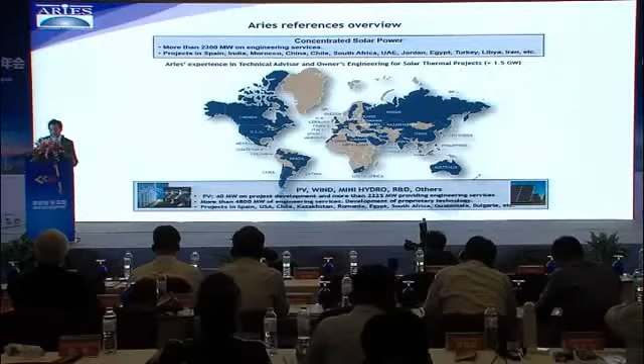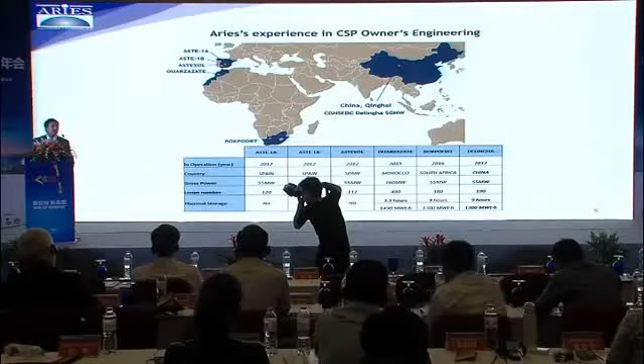In any case, I would like to point out the value, the experience in technical advisor and owner engineering for more than 1.5 gigawatts. The real experience in owner engineering is based on three 50 megawatt plants in Spain. These plants were constructed around 2009, 2010, 2011. Noor 1 was the biggest parabolic trough line in the world. Bokpoort, 55 gross power in South Africa, and nowadays the Delingha project.

What, at the end of the day, is the role of the owner engineering? Revision of engineering, something that was commented here. We are talking about the revision of basic and detailed engineering, typically from the EPC contractors, given that the warranties have to be provided by the EPC contractors. Quality supervision, monitoring of the schedule, which at the end of the day is part of monitoring the contract, contract management. Summarizing, safeguard the owner's interest.

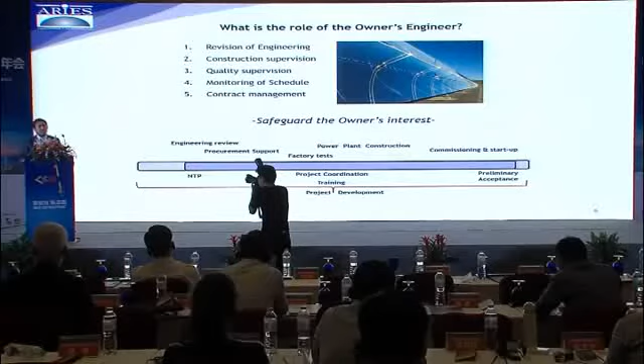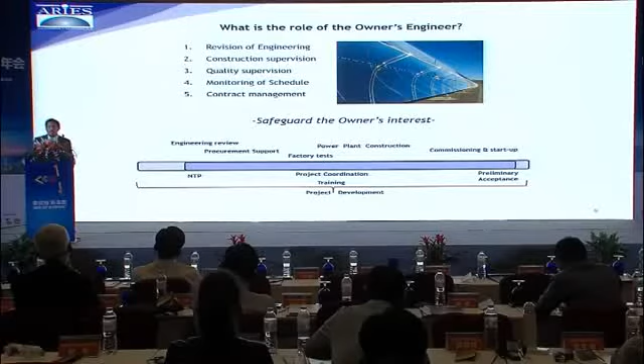This scheme, it's not always the same for sure, but is representative of the typical timing for the activities developed during our works in this kind of project. The previous stages, basically review of engineering and procurement, after that mainly the supervision during construction, commissioning and startup. The target: achieve the preliminary acceptance on time. I try to make a brief presentation, not going really deep into all the details, but I would like to show big numbers of these projects.

The first one is 50 plus 50 megawatts in Spain, called Aste 1A, Aste 1B. At that moment, you can see that the CAPEX was huge. We are talking about the boom, with very expensive components, with big warranties from the EPC contractors. In that project, we did the development from the very beginning: basic engineering, main equipment purchase process, financial model development in order to enter into conversations with funds and banks to raise the funds for the project, and all the works with the EPC contractor, like specification, tender evaluation, and negotiation with contractors.

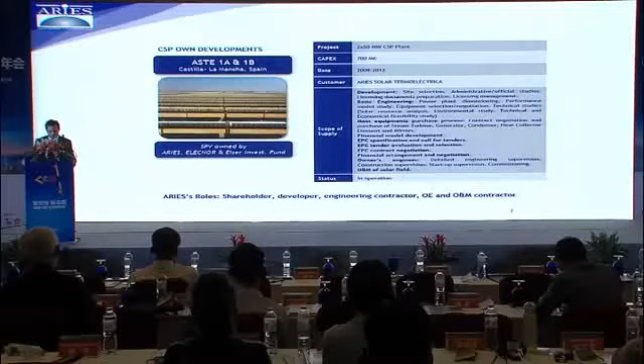In these two plants, we are part of the ownership. We have about 7% of the equity of the project, and these couple of plants are now producing about 105% of the initial guaranteed energy production. Astexol 2, another plant in Spain, very similar to the previous ones, so I try to go fast on this one. The other project was a couple of 50 megawatt plants, one close to the other, and this is a plant with only 50 megawatts, and the process followed was similar.

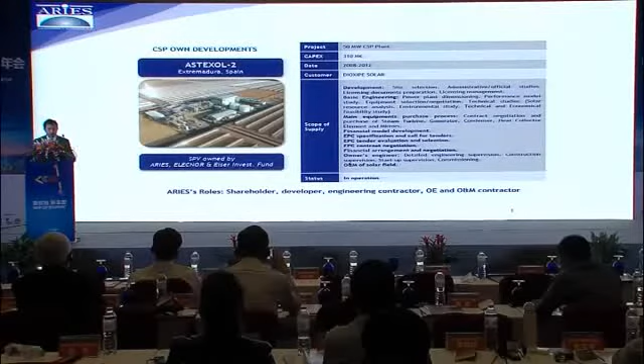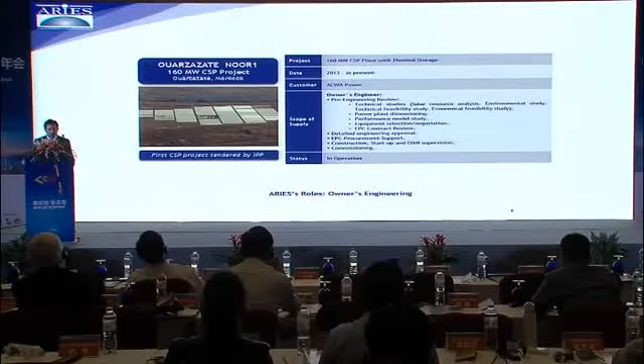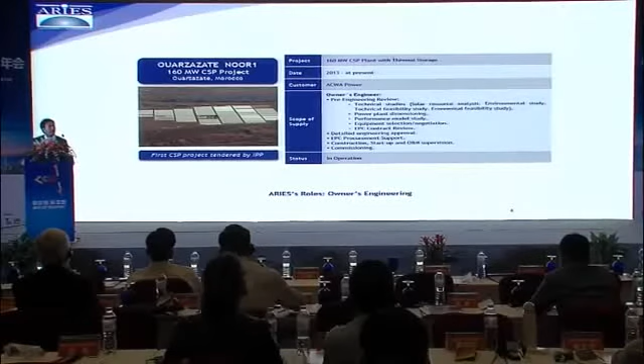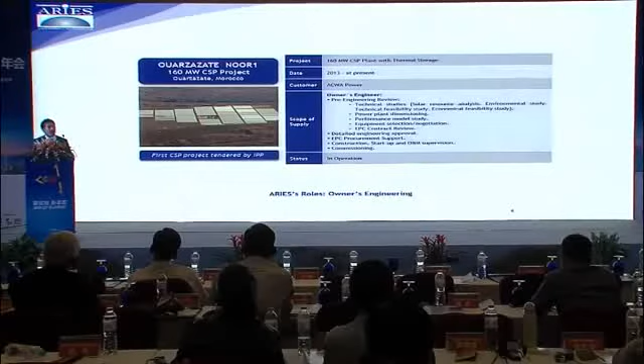Noor 1, now in operation. The customer, ACWA Power. In the owner engineering, in this case, the scope was a pre-engineering review. That means technical analysis, studies, feasibility, performance model. We have our own internal tools for those activities developed in-house. So we are able to compare the typical commercial tools with our tools, tested with plants now in operation in which we have real data because we are part of the ownership, so we are able to check the modeling with the real data and provide more realistic values over time. Detailed engineering revision and approval, EPC procurement support, construction, startup, commissioning.

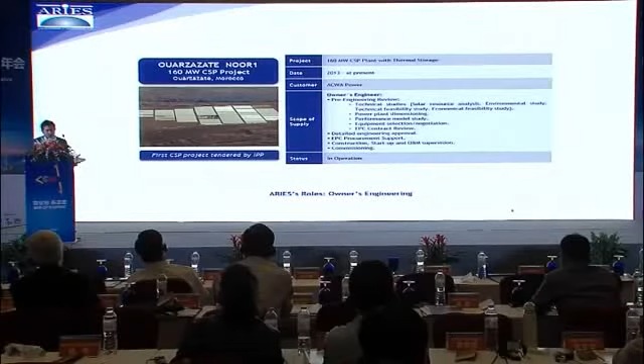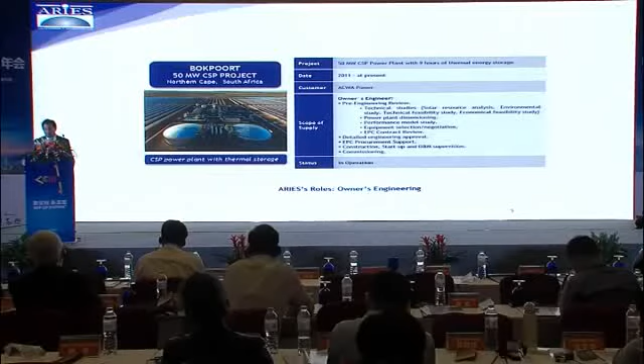Bokpoort, in operation I think a couple of months ago. The customer again, ACWA Power. The scope of supply was the owner engineering, following more or less the same: preliminary engineering review, detailed approval of engineering after checking, support during procurement, construction, startup, O&M supervision, commissioning.

How about the Delingha project? This is only a general overview, current status of the project. The place, the site is really special compared with other places that we have been working before. Probably in part because of some commentaries done previously by Mr. Bernard, and in addition because the place has probably low radiation, and there are 3 EPC contractors on the project.

One EPC contractor for BOP, one EPC contractor for the HTF system and TES, and another EPC contractor for solar field. The players involved by now: owner engineering Aries, turbine, Chinese supplier Dongfang, oil pumps Sulzer, really well known and used in a lot of plants in Europe. Ensival, salt pumps, another critical supply. Harbin turbine for the SGS in China here.

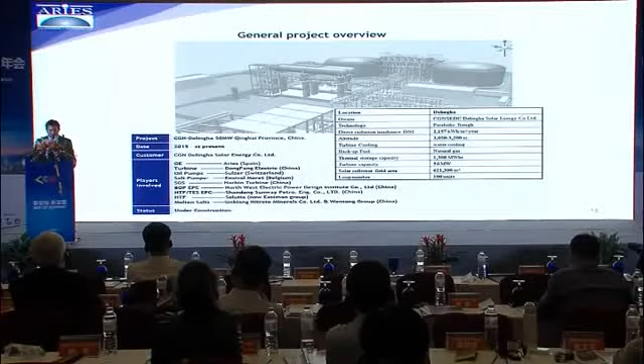Northwest Electric Power Design Institute for the EPC of BOP. The EPC of HTF TES by Shandong Sunway Petro, HTF Solutia, that you know now has been purchased by Eastman Group, a big US consortium, and molten salts, that is again new in this kind of projects, by a local supplier, Qinghai Nitrate Minerals.

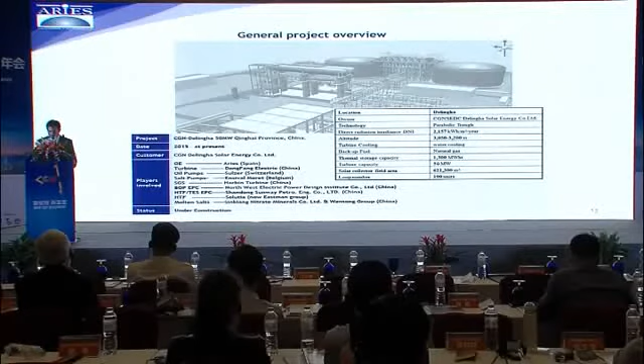Project structuring and coordination. Owner, CGN, is in the middle of the OE services and the EPC contractors. The structure of the OE is project manager of OE, that in this case is me, an engineering manager in Madrid that is in charge of all the revision on engineering and technical discussions, and a site manager that is living continuously in Delingha.

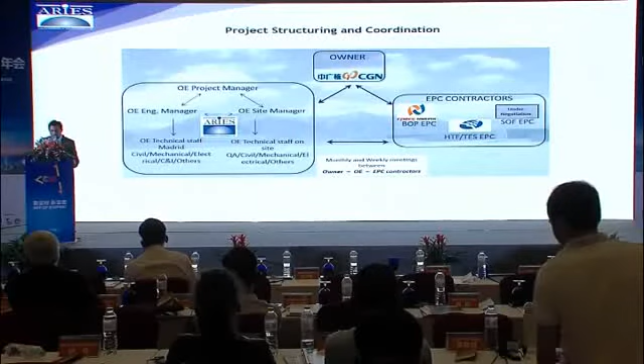The EPC contractors by now are fixed, the BOP and HTF TES. The solar field EPC is selected and is really close to signing the contract, but now is under negotiations. And the relationship between these three parts is monthly, weekly meetings between them, and for sure, the daily work on site.

The definition of owner engineering services in Delingha is something like this. Engineering design review, previously revision of basic, now revision of detailed engineering, to ensure that the contract scope is properly reflected, carried out by the EPC contractor in engineering. This is probably the first step and the key one.

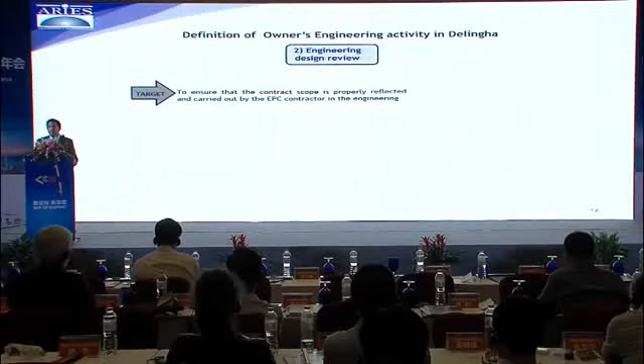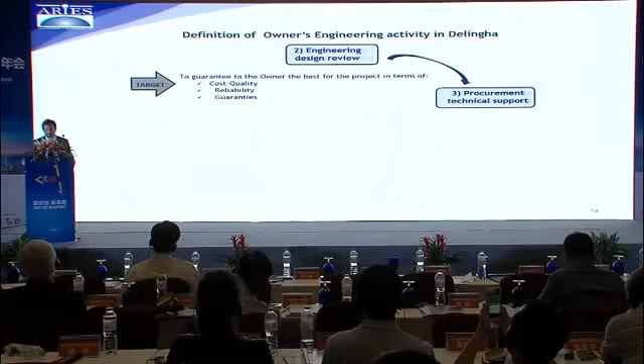Procurement technical support. It means guarantee for the owner the best in terms of cost, quality, reliability, and warranties. Aries was present in the bidding process for all the critical supplies, selecting components, raw materials, and going to some tests in factories. Factory acceptance services, to ensure the right equipment manufacturing, mainly critical for components that are really far from China, and CGN in special needs the support.

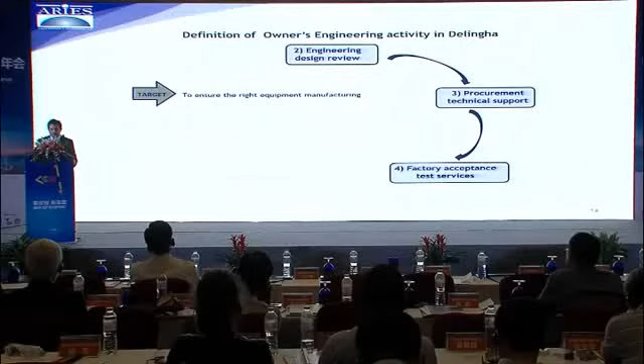And follow up the construction, that is 60%, 70% of our time, to support the proper development of works in schedule, scope, cost, and quality. In this moment, I have to remember again the different figures between an OE and EPCM, and the responsibilities of both for the revision of the activities. And the last, and not the least, is support the commissioning and startup, achievement of preliminary acceptance on time and in good conditions.

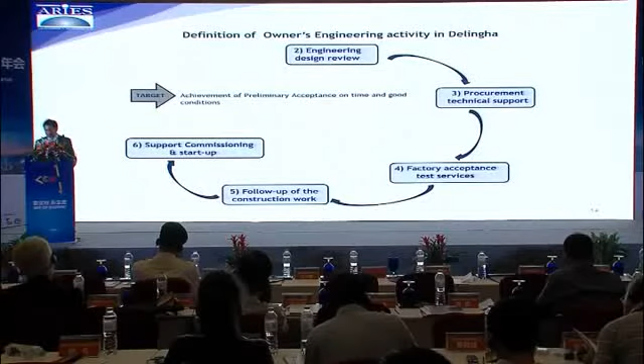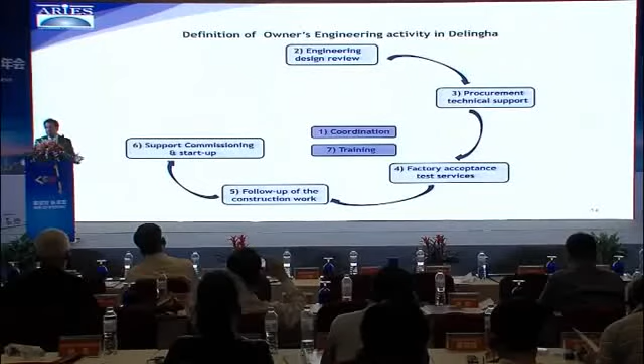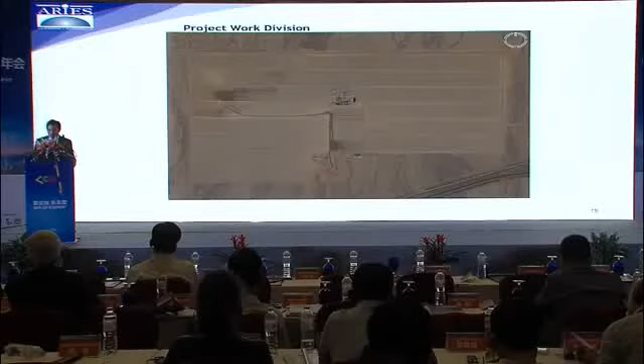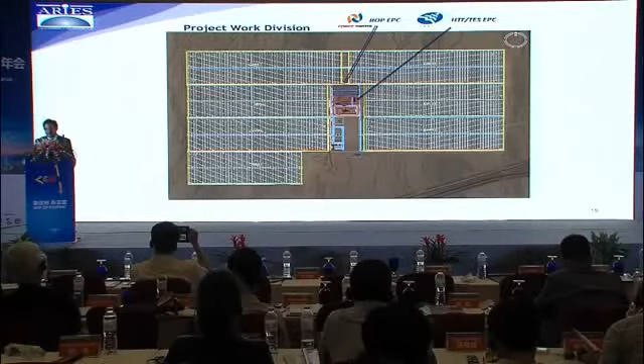And during all the life of the project, coordination and training. That is something that we don't use to do in other projects, but in this case especially was required by our client to have a full and continuous training during the more or less 2 years of construction period. Project work division, this is the site shown previously. Small part, but critical one, BOP EPC, HTF/TES EPC area, and solar field.

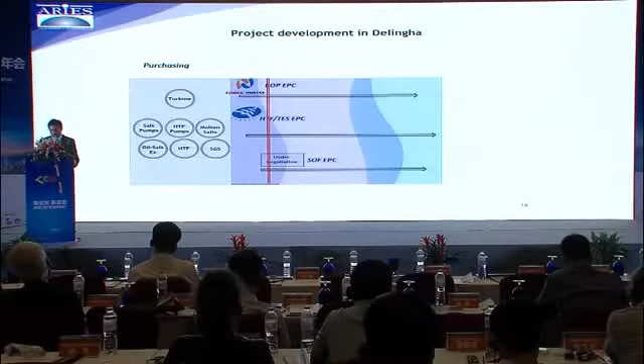The project development now in Delingha, this is a figure only, like a draft. Some main activities of purchasing have been done. Main activities in civil works execution have been done in BOP EPC. We are progressing in HTF/TES EPC, and solar field starting. Electromechanical activities are starting in BOP EPC and have not started really yet in HTF/TES, but we are in that, and for sure by now in solar field.

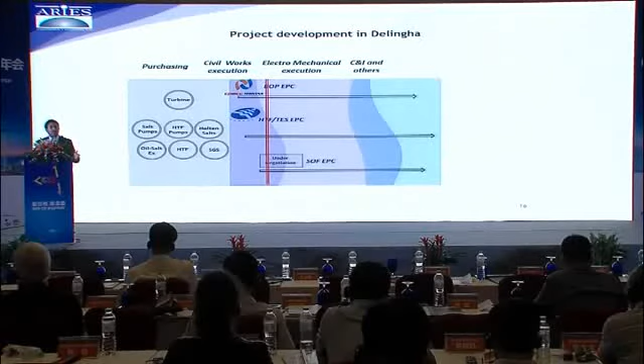Considering that there are 3 EPCs, it's not possible to achieve the preliminary testing at the same time. But for sure, the commissioning will be done in different moments, the pre-commissioning, the cold commissioning, but all of them have to start up in the same moment. As you can imagine, all of them are interconnected.

This is one of the challenges in this project, to be able to have at the same time the system, mainly HTF and TES system, ready for starting, for being able to send oil to the solar field. So at the end of the day, it means to finish everybody at the same time for a preliminary acceptance that is scheduled in the second half of 2017.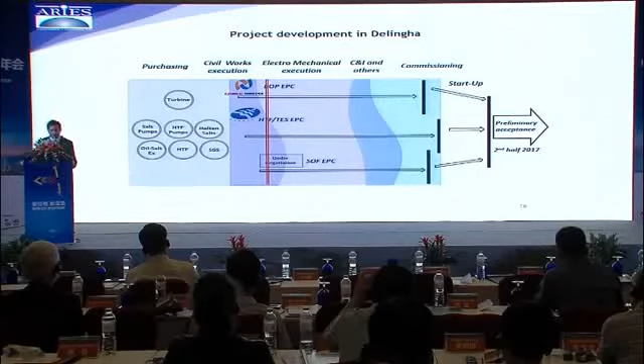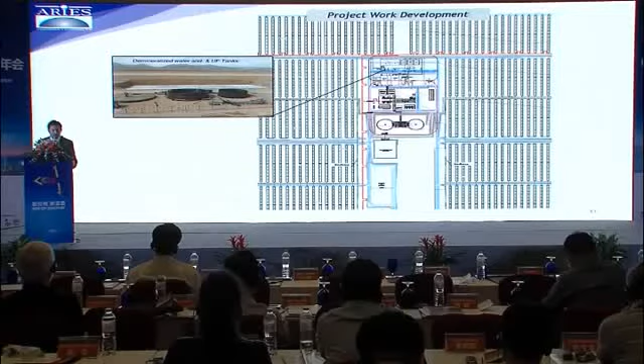I am going to show some photographs that I received from my people on site from the monthly and weekly reports. Probably they are not so nice, but I think they represent what is being done now on site. The BOP area with a turbine building erected, the deaerator bay, demineralized and ultrafiltrated tanks, steam turbine engine room structure, water treatment and electrical control building,

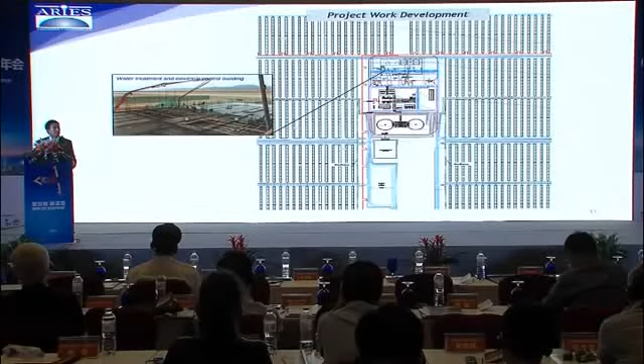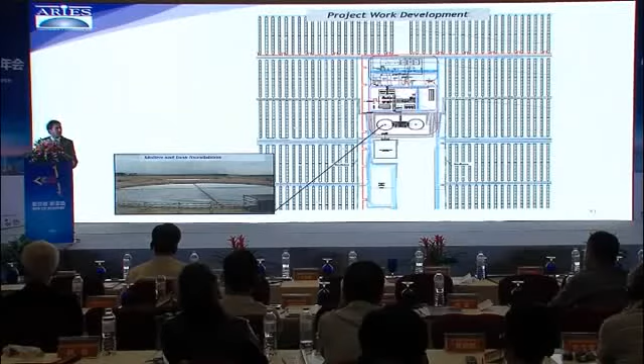nice photograph, the back side of the molten salt tanks with the pipes for refrigeration, the molten salt tank foundations, cabin room, workshop and warehouse foundations.

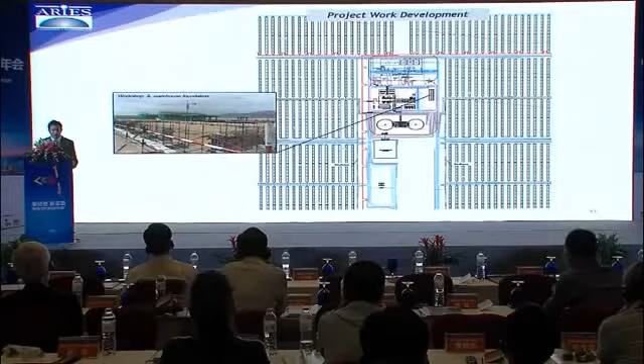Some conclusions that I would like to put on the table, available for discussing with everybody of you. First of all, the project is on execution and progressing for its fulfillment. The experience in Delingha will be important and valuable for future projects here in China. EPC contractors are achieving experience and confidence, very important. Critical components and new suppliers, mainly suppliers from China, I'm talking about turbine, SGS, molten salt, and so on, being proved in this solar power plant is important for future projects.

Companies involved will acquire skills on critical systems and solar technology. Frankly speaking, I'm now thinking about the TES system. According to my point of view, it's advisable that new projects will be supported by companies with real reference on CSP and experience in this sector. The future in China is very exciting. It's very promising. And now we all are pending on the final feed-in tariff value.